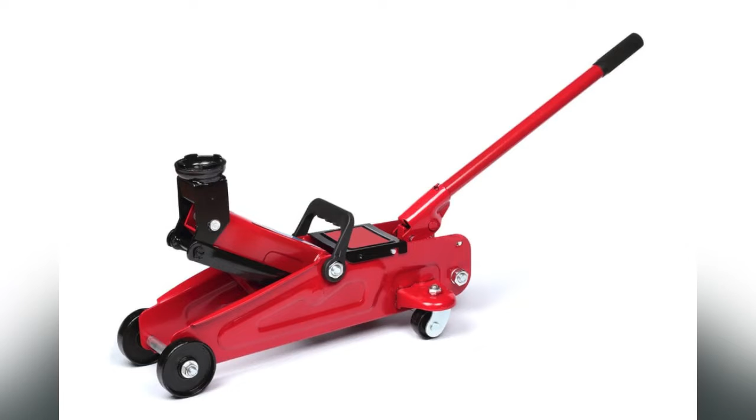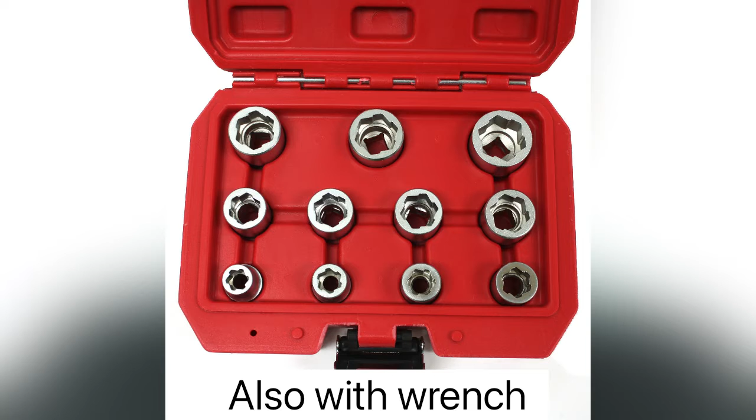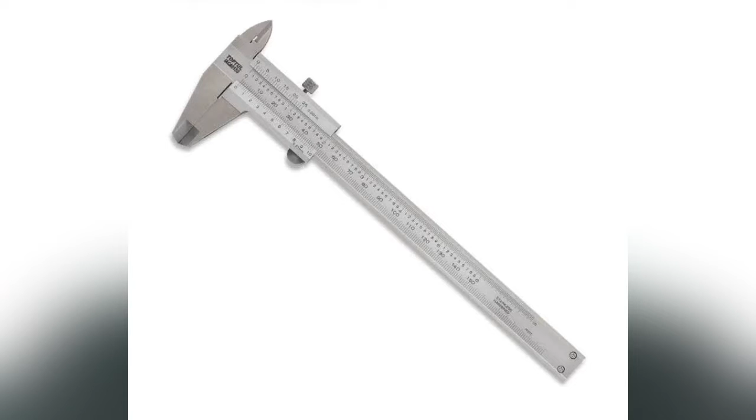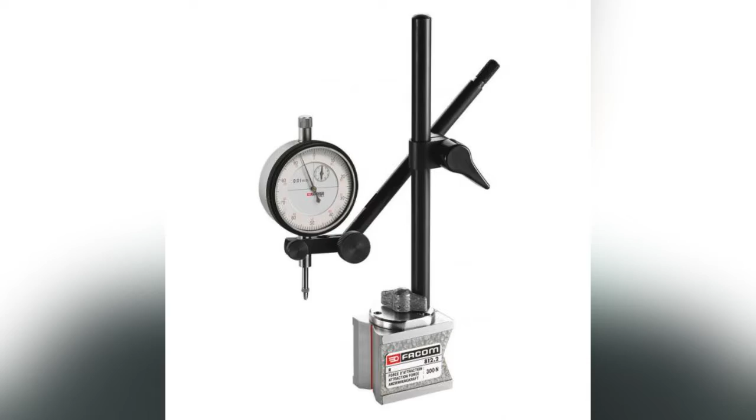Before we begin our lab demonstration, I would like to share with you all the equipment and tools that will be used in this lab session. First, we will use a jack to lift the car, and then a jack stand to hold the car after jacking. Next, we will use a bolt socket to loosen and tighten the tire nut, and a ring and coupling spanner for removing the caliper nut. We will also use a vernier caliper to measure the thickness of the disc brake, and a dial gauge to measure the surface of the rotor.

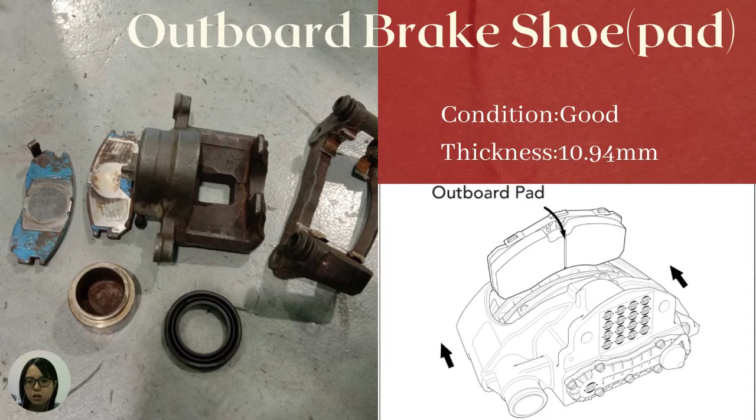On the left-hand side, the picture shows the parts that we have dismantled. On the right-hand side, the figure shows the outboard brake shoe, or outboard brake pad. The outboard brake pad is located outside of the brake caliper. It is a moving part which moves along with the guide pin and the brake caliper to contact with the disc brake, and lastly it attaches to the inboard brake pad to provide braking performance.

The thickness of the outboard brake pad is 10.94 mm, which is considered good condition, because the thickness of the brake pad should not be less than 3 mm. If it is less than 3 mm, we advise the driver to service their brake pad.

This is some small research regarding the thickness of the brake pad. As mentioned, our measurement for the outboard brake pad is about 10 mm, which is considered light wear and still usable in the long term. If the thickness of the brake pad is less than 3 mm or 2 mm, we advise the driver to change it.

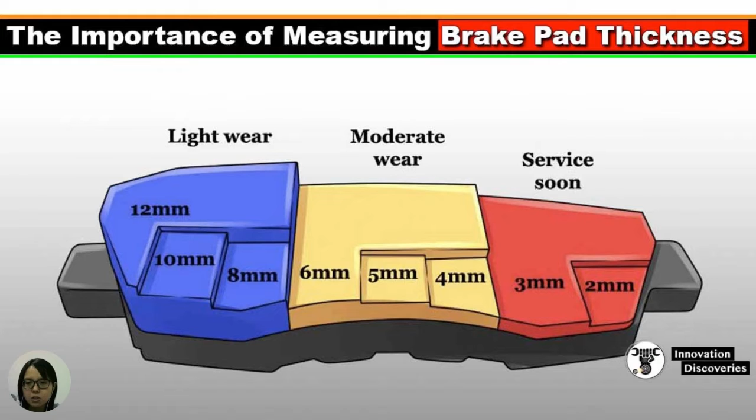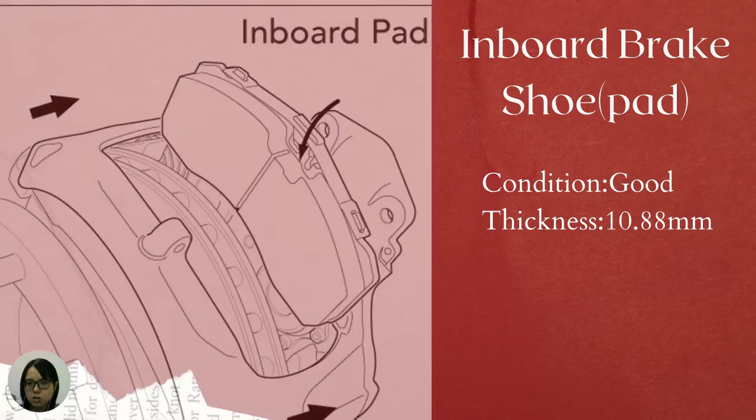Next, we discuss the piston and the cylinder bore. From the picture, we can observe there is no rusting, and the cylinder bore is in lubricated condition, which will reduce friction within the piston and the cylinder bore.

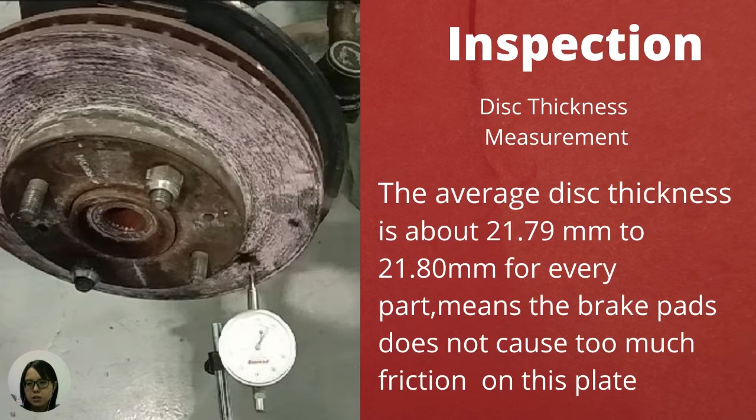Next, we discuss the inspection of the disc thickness measurement. This is the picture of the disc brake. The average disc thickness is about 21.79 mm to 21.80 mm for every part, which means the brake pads do not cause too much friction on this plate.

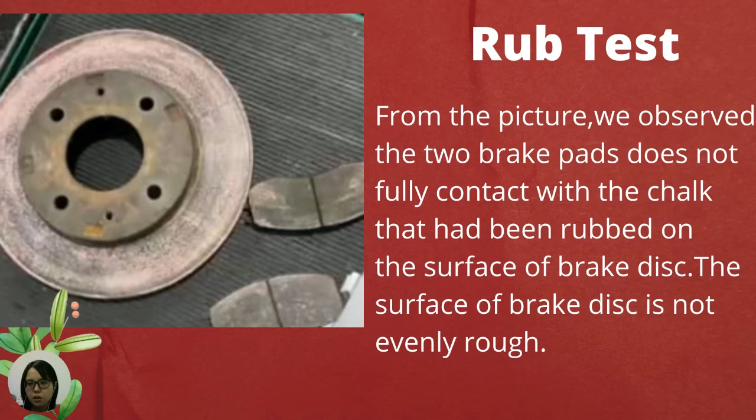This is the rub test. From the picture, we observe that the two brake pads do not fully contact with the chalk that have been rubbed on the surface of the brake disc. The surface of the brake disc is not evenly rough.

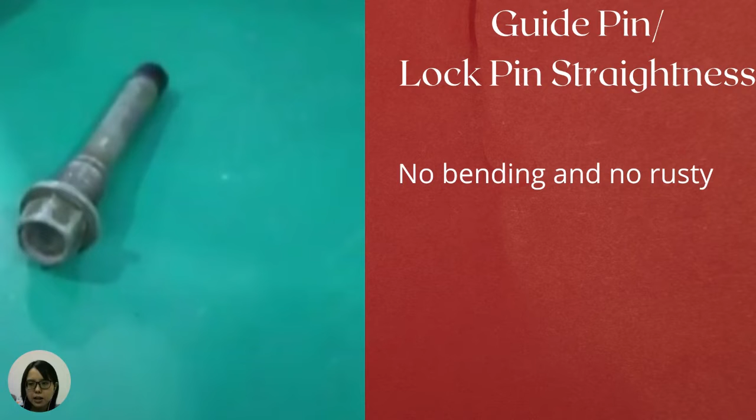Lastly, this is the guide pin, which allows the outboard brake pad to move within the brake caliper to provide braking performance. We have to ensure that the guide pin is not bent, always straight, and not rusty on the surface.

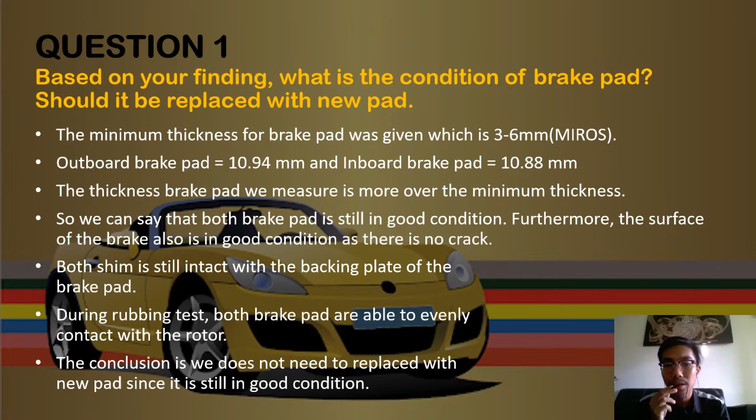There are two causes of rotor thickness variation. First, excessive lateral run out. Lateral run out is the rotor wobbling from its axis back and forth. The repeated contact with the brake pad over time causes that section of the rotor to become worn, or brake pad material is spread unevenly on the rotor surface.

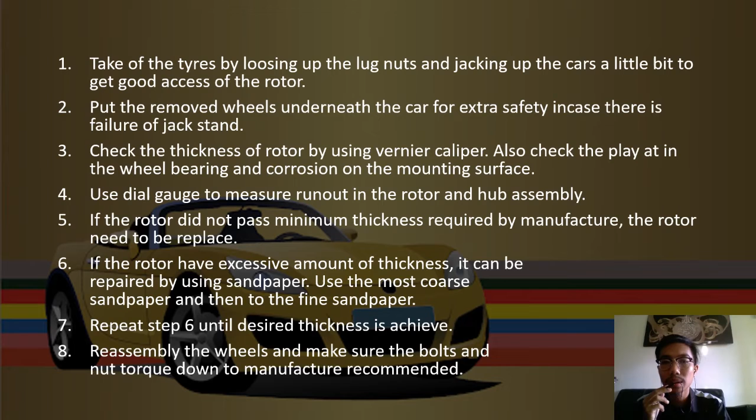The correct repair procedure is, first, take off the tires by loosening the lug nuts and jacking up the car a little to get good access to the rotor. Put the removed wheels underneath the car for extra safety in case there is a failure of the jack stand.

Third, check the thickness of the rotor using a vernier caliper. Also check the play in the wheel bearing and corrosion on the mounting surface. Use a dial gauge to measure run out in the rotor and hub assembly.

Fifth, if the rotor does not pass the minimum thickness required by the manufacturer, the rotor needs to be replaced. Sixth, if the rotor has an excessive amount of thickness, it can be repaired using sandpaper, starting with coarse sandpaper and then fine sandpaper.

Use the coarse sandpaper and then the fine sandpaper. Seventh, repeat step six until the desired thickness is achieved. Lastly, reassemble the wheels and make sure the bolts and nuts are torqued down to manufacturer recommendations.

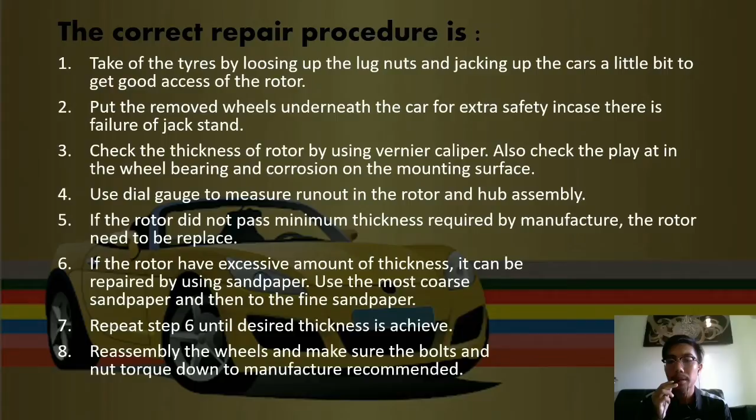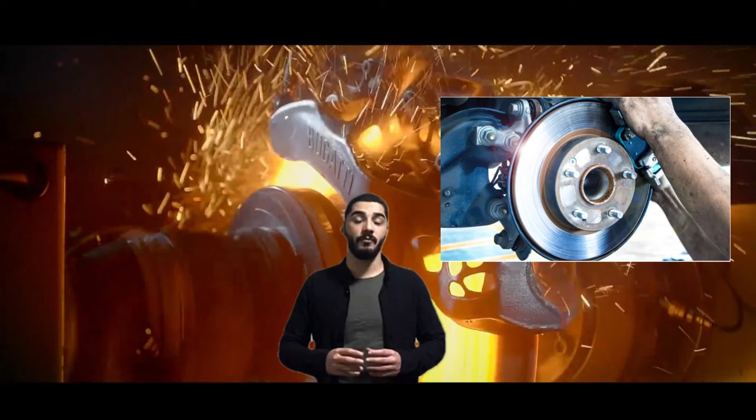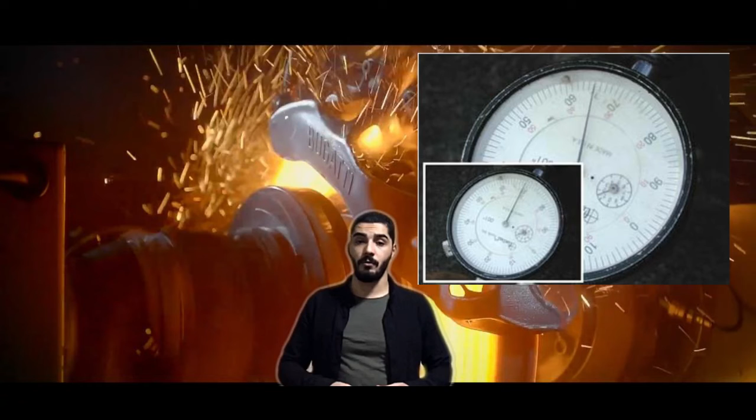The run out measurement data is a method to get the high spot of the brake rotor and the variation in thickness, and it's a measurement of the surface thickness of the disc brake rotor. From the data obtained, we can know whether the rotor is within manufacturer specification or not.

A dial gauge is used to obtain the high spot value. The method of run out measurement is to put the dial gauge contact point facing the rotor and rotate the rotor.

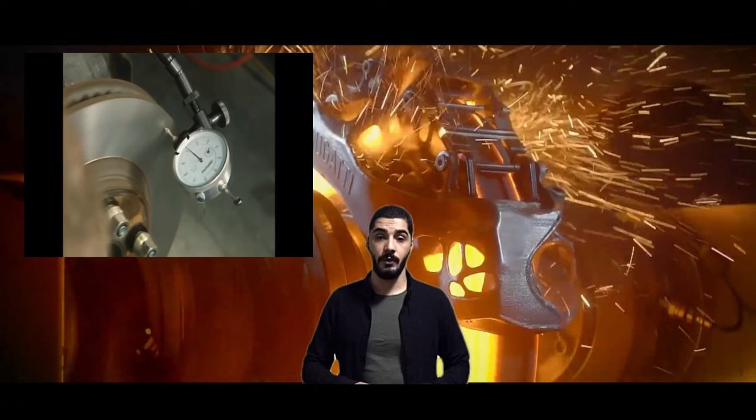Question number 4. What is your finding for the guide pin straightness check? We found the guide pin is still in good condition and can move smoothly when rolled on a flat surface. Guide pins are responsible for guiding the proper angle for how the brake pad meets the disc.

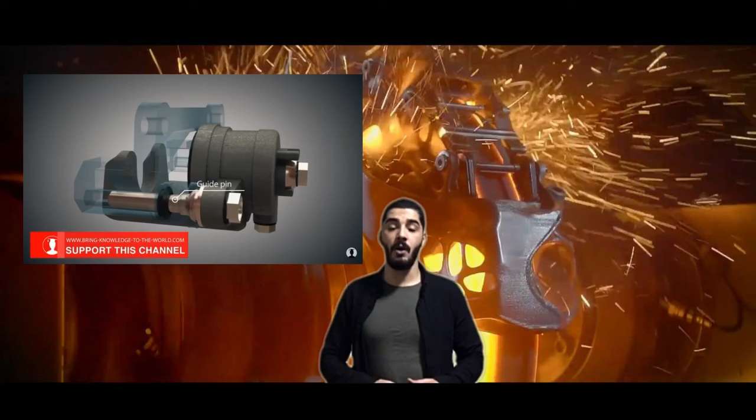So what happens if they are not straight? First, you could experience noises or a problem stopping. Second, the brake could stick or grab while driving, or you could hear a grinding noise if the calipers aren't meeting the rotor at the proper angle.

We can disassemble and assemble it back very well. And lastly, we get to know the name of each part of the assembly so easily.